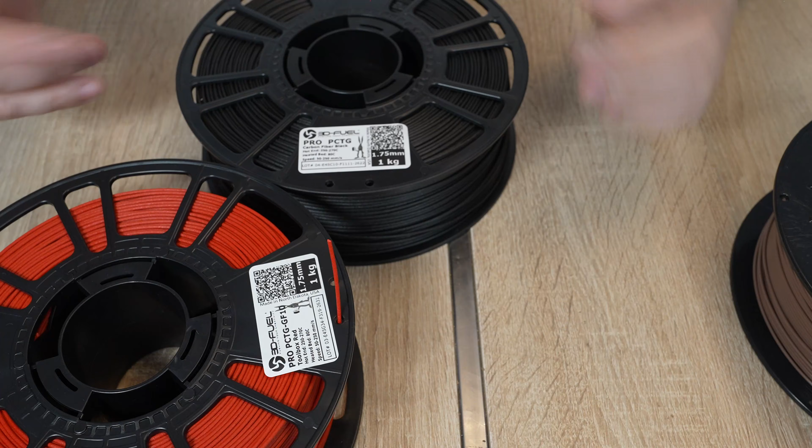Pro PCTG, made in the USA, reinforced with glass and carbon fibers. But I will also include the results from my earlier video for non-fiber reinforced PCTG.

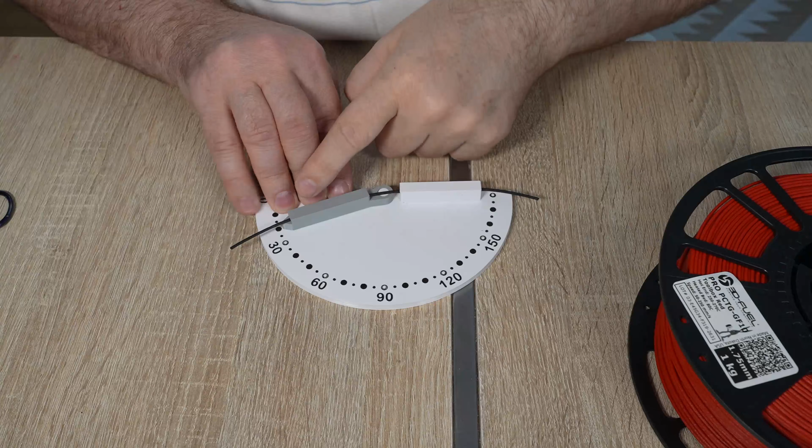Let's see how brittle these filaments are. Carbon fiber version, let's measure it. Start angle 20 degrees. Around 110, moderately brittle. Basically it will be fine in any printer, it's not even completely broken.

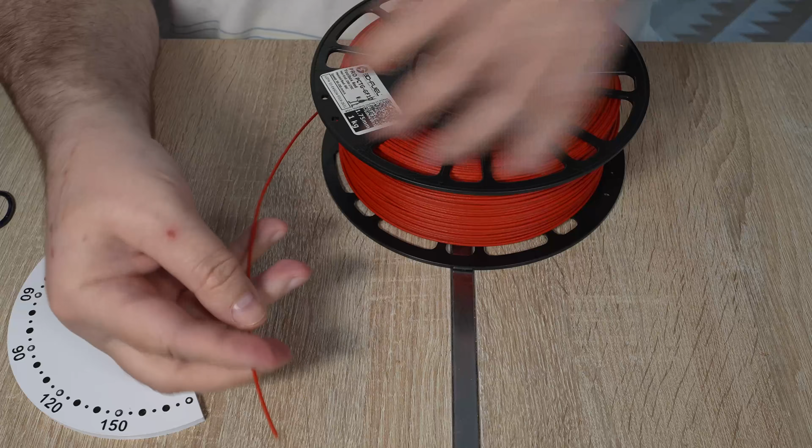And now the glass fiber version. Probably it will not even break in my test. Start angle 20 degrees. No, it's not even completely broken.

Carbon fiber is typically black, because carbon fibers are black and usually we get a black or very dark color. With glass fibers we have more freedom because they are transparent, so we can have lighter colors too, and this one is in a nice red color.

Now I can see more filament here, so maybe the density of the carbon fiber version is lower compared to the glass fiber, because the spool size should be the same. Let's measure them just in case. Theoretically these are both 1 kilogram netto weight spools.

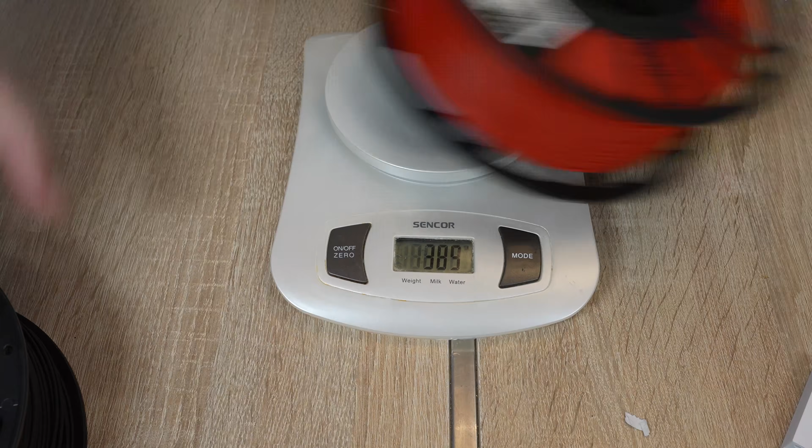1192, 1170, close. Since this was not vacuum packaging, even if they had some desiccant inside, I will dry these filaments before printing, and my drying settings will be for PETG, typically 65 degrees Celsius for 6 hours.

I don't have their PETG filament anymore from my earlier testing, but I still have this PCTG in brown color without any fiber reinforcement, and I want to reprint some test objects because I have some new equipment and want to repeat some tests with all three filaments, for example impact or bending tests. At that time I didn't do it with that comparison video.

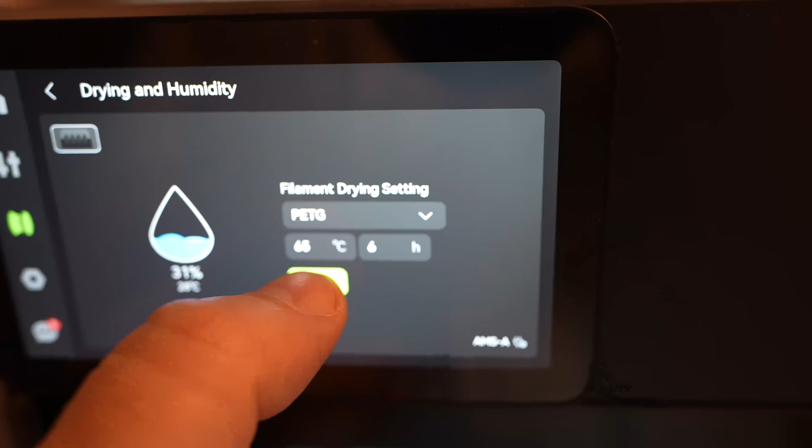Just in case, I started with the drying. PETG setting: 65 degrees Celsius, 6 hours.

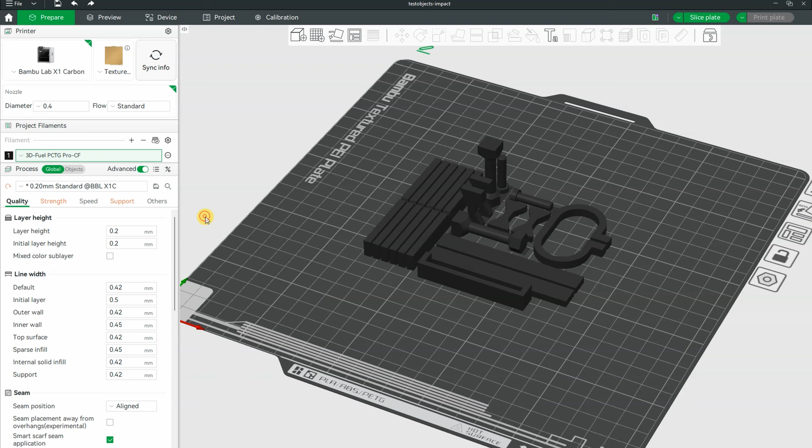3D Fuel offers a profile for their filaments. This is for the carbon fiber version, and the printing will be on the X1 Carbon. These are my regular test objects, and let's set that profile. This is the carbon fiber version. I changed the nozzle temperature to 270 because this is the maximum recommended, 80 on the bed, maximum flow rate, and part cooling between 0 and 10%.

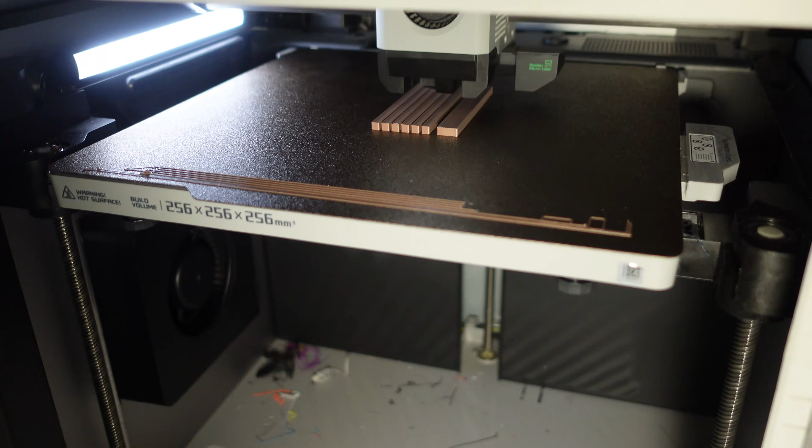No-fiber PCTG, the missing test objects. This is the carbon fiber version, and this one is reinforced with glass fibers.

Printing was perfect in all three cases, and I really like how those fibers hide layer lines.

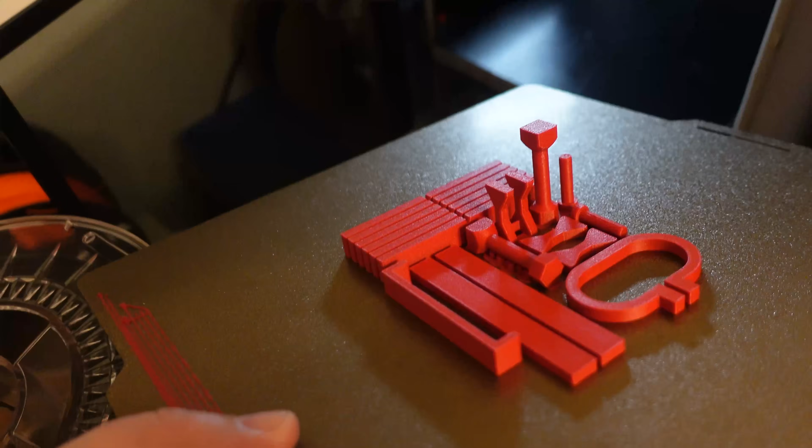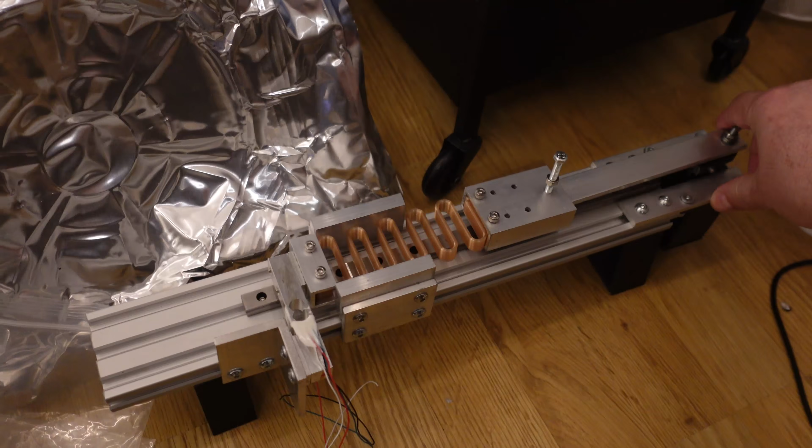I also printed some test objects for the fatigue test, and this spring I printed from all three materials. The hardware is prepared, only the Arduino and the software are not ready yet. That video is coming soon, but I need something now for the practical application example.

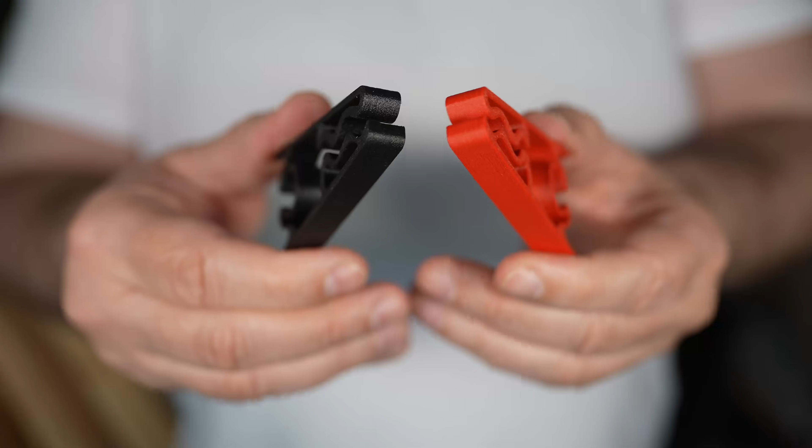A spring clip from glass fibers, carbon fiber version. I'm not sure if this is a good application for this material. That fatigue test will show this in the future.

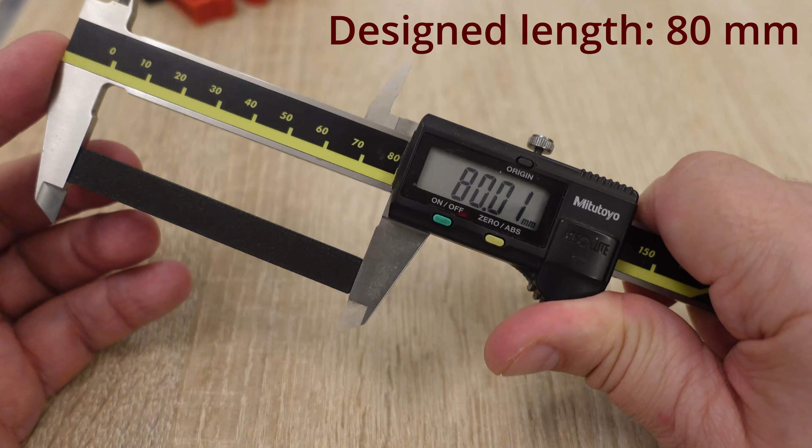PCTG has great dimensional accuracy, and fibers just help here. This is the carbon fiber version, and this is the glass fiber.

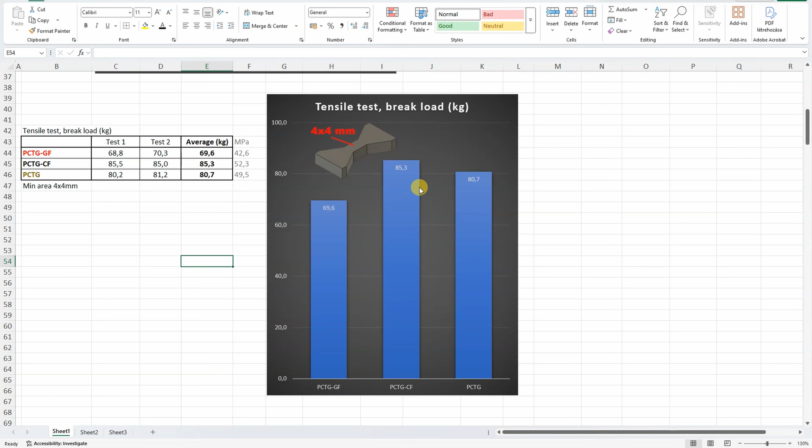But let's start with the testing. This is the tensile test, glass fiber version, and carbon fiber version. Between these three materials, the strongest is the carbon fiber version and the weakest is the glass fiber objects.

Layer adhesion with vertically printed objects. And now CF.

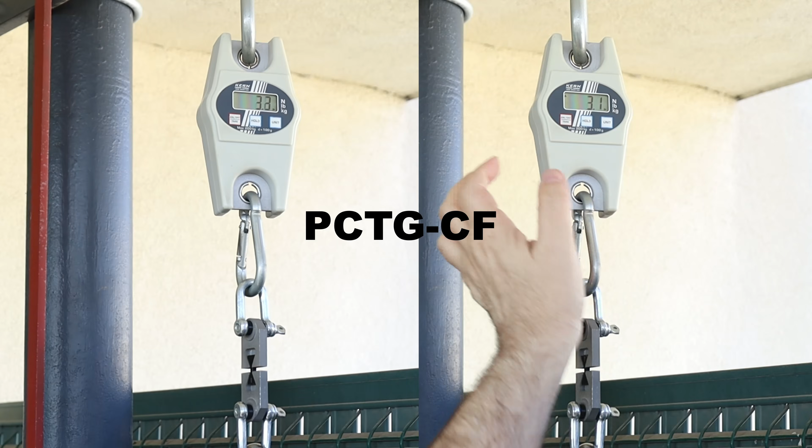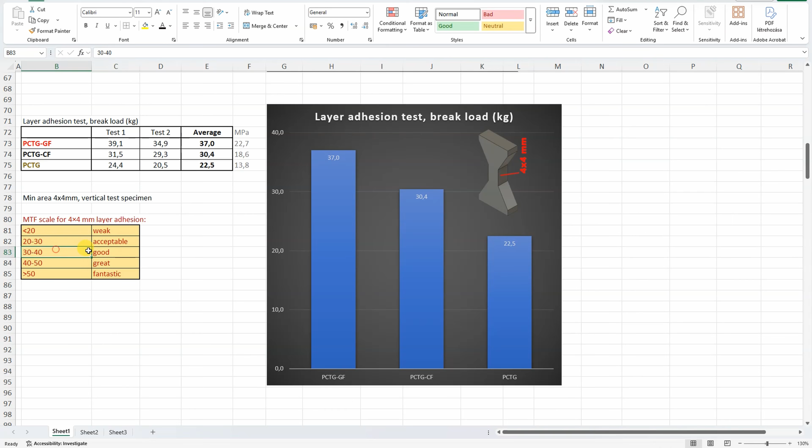This was a very pleasant surprise because usually fibers make the cross-section weaker, but it looks like this fiber sticks good somehow to the base material because this is a good layer adhesion according to my rating and stronger compared to the no fiber PCTG. One of the reasons for better layer adhesion of fiber versions is a smaller part cooling, only between 0 and 10%, until with the PCTG it was between 10 and 40%.

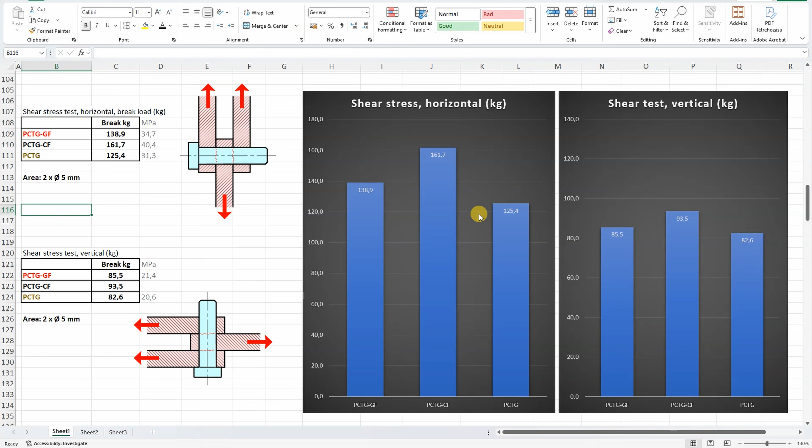Shear test, side-by-side horizontally printed specimens, and now vertically printed objects. When printed in horizontal position, fibers always help a lot, and we can see the two fiber versions are stronger compared to no fiber PCTG. Printed in vertical position, these are very similar values.

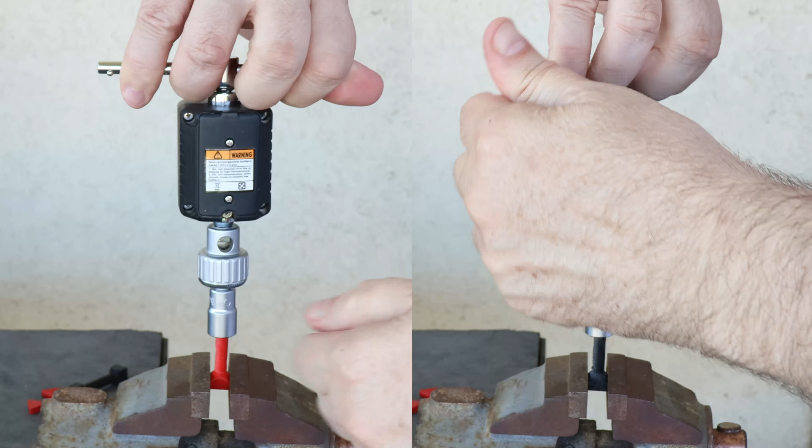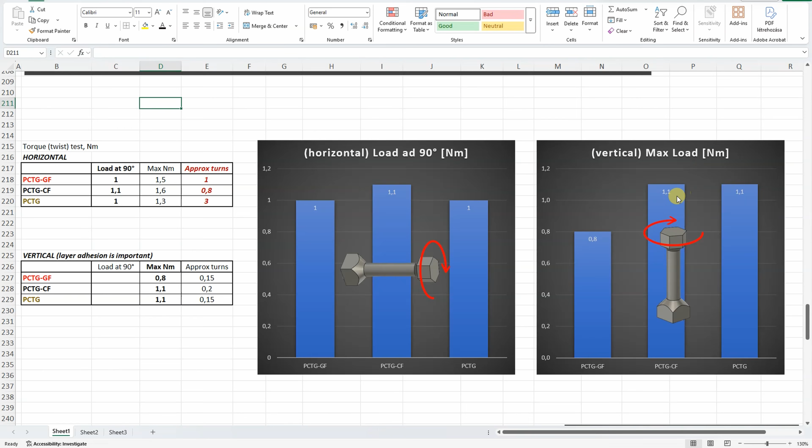Torsion test, horizontally printed objects. 1.1, this was loaded at 90-degree rotation, and now the maximal load, 1.5. Vertically printed specimens, 0.8, the maximal load, 1.1. Printed in horizontal position, loaded 90-degree rotation is very similar in all three cases. Printed in vertical position, only the glass fiber version is a little bit weaker.

3-point bending test. Distance between supports is 50 mm. And I am placing these loads one by one, and I am measuring the deformation after 1, 30 and 60 seconds. Currently you can see the deformation under 10 kilograms.

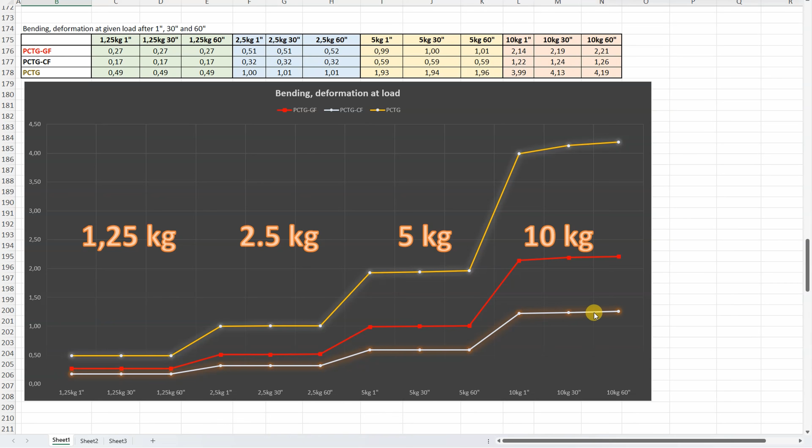Well, something we could even predict, because fibers make the parts stiffer, and between these two, the carbon fiber version is stronger, and very minimal deformation even under 10 kilograms during this 1 minute.

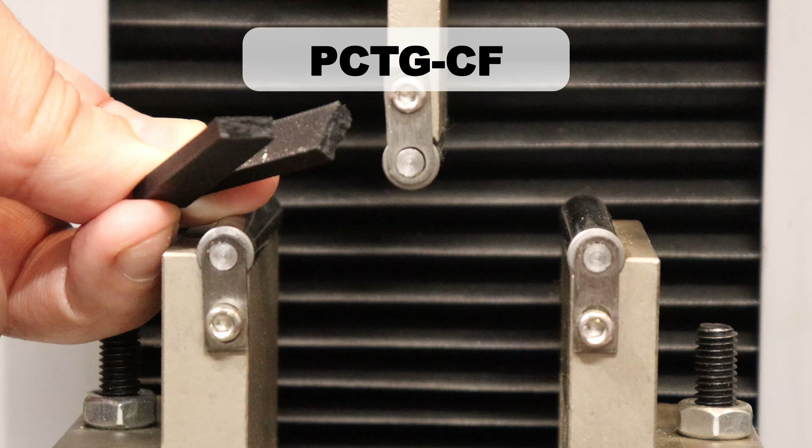Another bending test, no fiber version, glass fiber, and CF version. This describes these materials well. PCTG shows the biggest deformation with no break, smaller deformation before failure on the glass fiber, and the carbon fiber broke. Even these graphs tell us a lot about these materials.

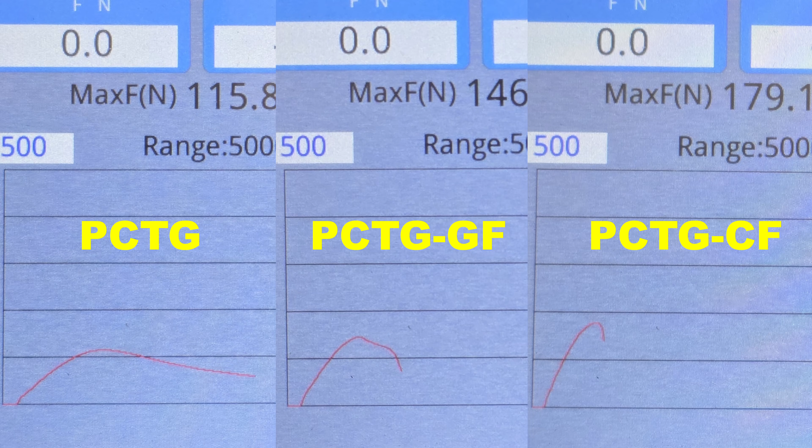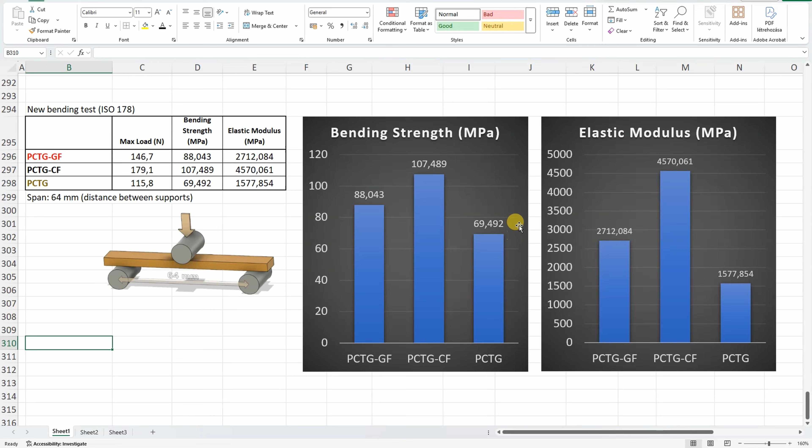The force in function of time or deformation, maximal load, bending strength, and elastic modulus. Similar order we already saw with the previous bending test. The strongest is the carbon fiber version in both bending strength and elastic modulus, second the glass fiber version, and the weakest between these three is no fiber PCTG.

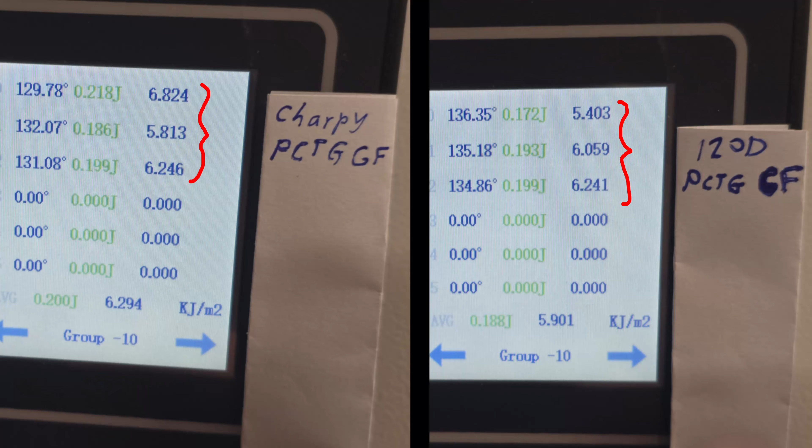Izod impact test, side by side all three materials. With PCTG the first measuring was not recorded, only the angle, so I had to calculate the breaking energy. The other two, no problems, all three measurings are visible.

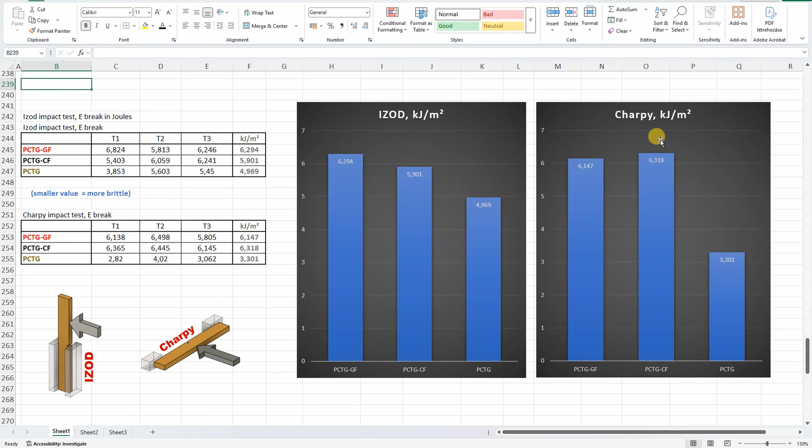Charpy test, specimen held on two sides horizontally, and side by side results for all three materials. After the layer adhesion, another pleasant surprise, because usually fibers make the parts more brittle, but that's not the case here. Both are noticeably tougher compared to the no fiber version.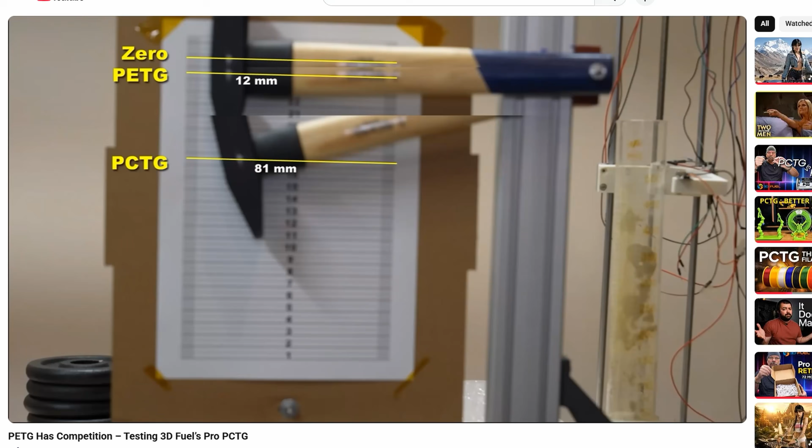Now on my DIY impact tester I could measure 2 times bigger value for raw PCTG, but even this one is 2 times stronger than average PETG.

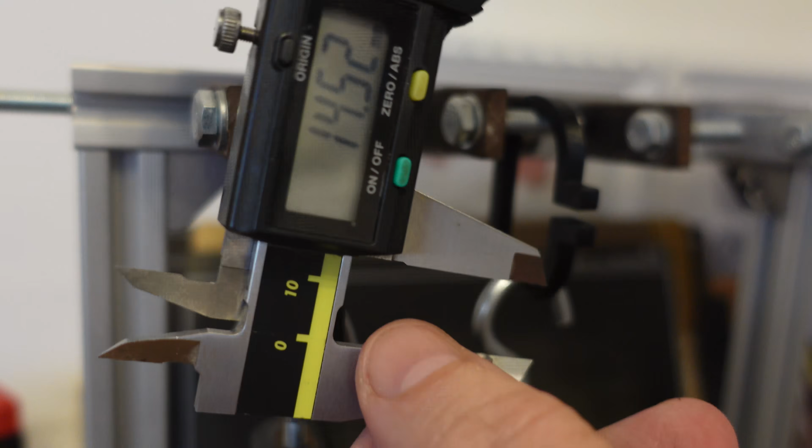Creep test, the deformation under constant load of 1.25 kg, locking the position for more accurate measuring. 14.52, 13.34. Day 5, the last measuring. 14.88, 13.52. Let's remove the load.

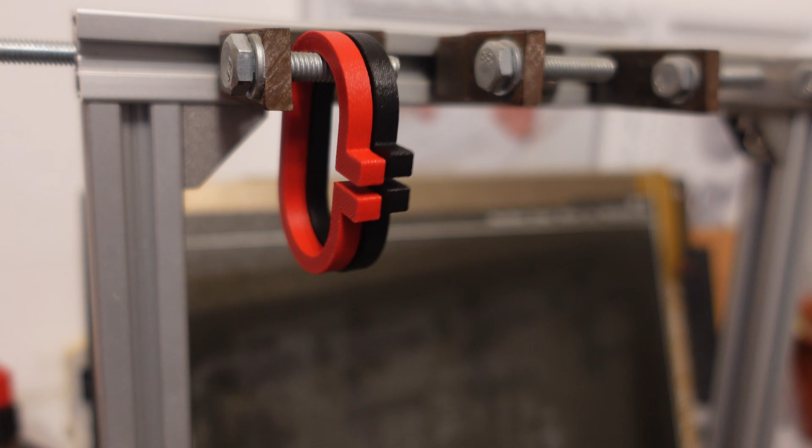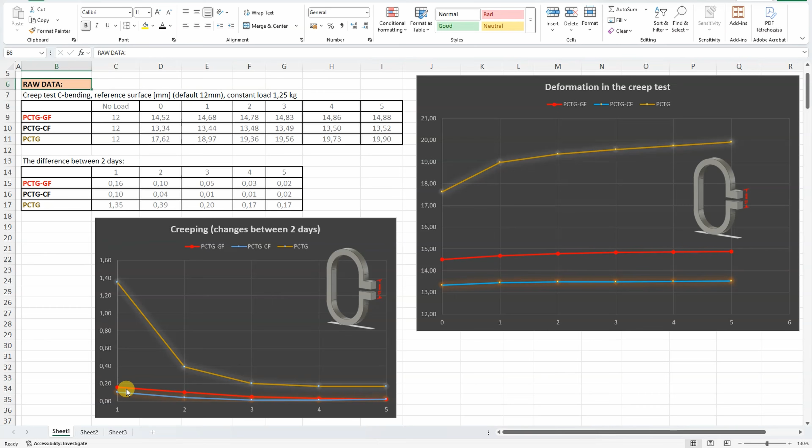Permanent deformation is very minimal and almost equal. On this graph we can see the distance between two reference surfaces, and we can see quite a lot of deformation on the no fiber version of PCTG, and then glass fiber, and the smallest deformation on the carbon fiber version. Now the creeping is the difference between 2 days, and that's presented on the second graph, and we can see significantly more creeping on the no fiber version, and the creeping on glass and carbon fibers is very similar.

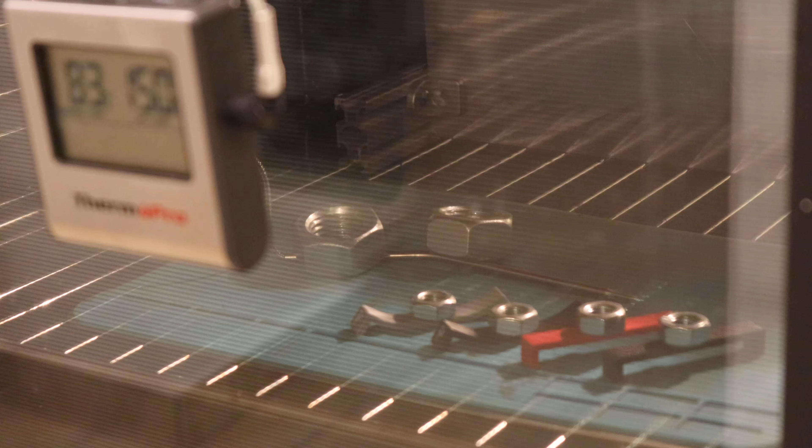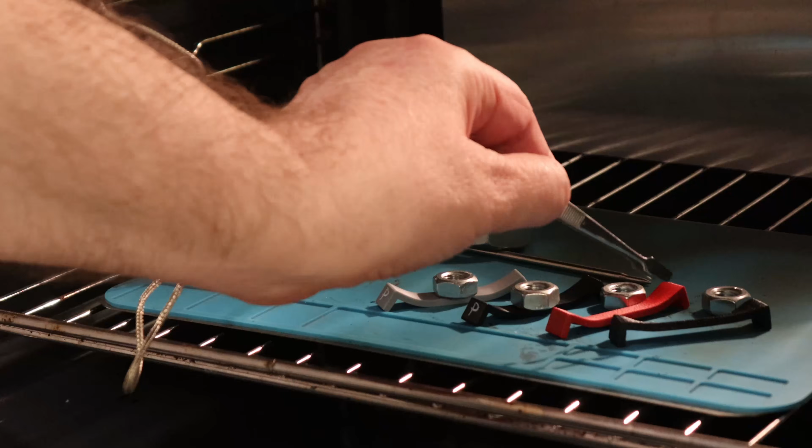Temperature test in the oven, and the 2 on the right side are the PCTG filaments from this video, and they started with the deformation at approximately 94 degrees Celsius. At 128 I stopped the experiment and I opened the oven just to check how soft they are. It's typical that the fibers will increase the temperature resistance, but I didn't expect such a big difference here.

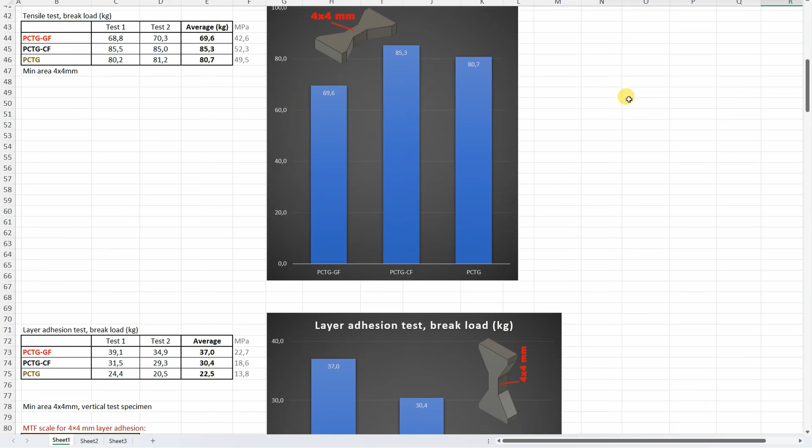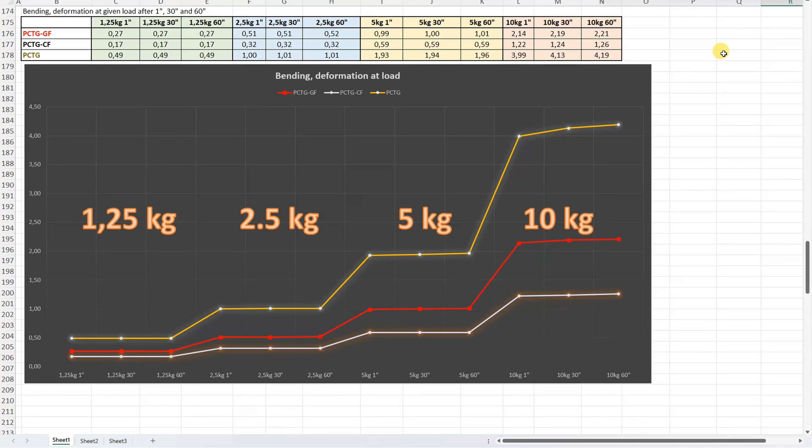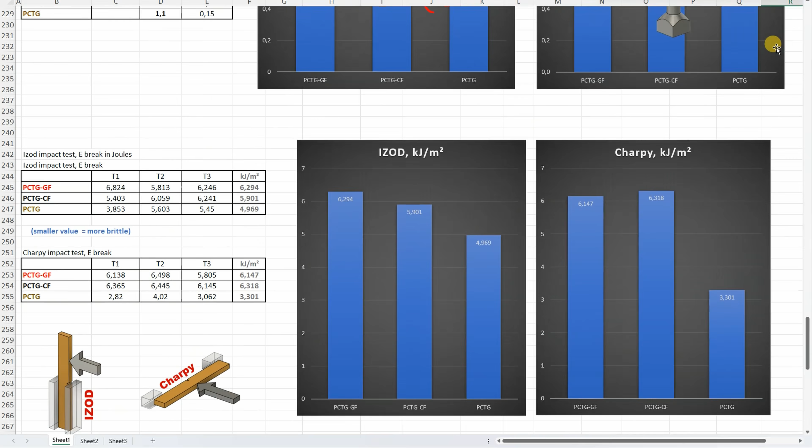All results one more time: creep test, tensile test, layer adhesion, shear test horizontal and vertically printed, bending test deformation after 30 seconds, bending test deformation under these loads after 1, 30 and 60 seconds, torsion test horizontal and vertical, impact test Izod and Charpy, temperature test, and that second bending test.

Well, these two fiber-reinforced PCTG filaments were really a pleasant surprise, and I could almost say it was worth it to pay that expensive shipping from the US to Europe. Yes, the carbon fiber version is definitely stronger in most cases. Glass fiber, maybe I can see 2 or maybe 3 advantages.

One is the layer adhesion, the difference is not big, but it's there. The second, probably we can have a bigger option for colors, because the glass fibers are transparent, and we can have, for example, this nice red color too. With carbon fibers we can have only some darker colors, if not black.

And the third one, maybe it's not so important, but glass fiber can be dried or pre-dried in a microwave, carbon fiber not. With the PCTG I don't use this possibility too often, but sometimes I can speed up the drying process by pre-drying in a microwave, let's say 2 or 3 times 30 seconds, and then it can go much shorter time into a regular filament dryer.

Okay, so this was my experience with these PCTG Pro filaments. If you have some other, fill them in down in the comment section.